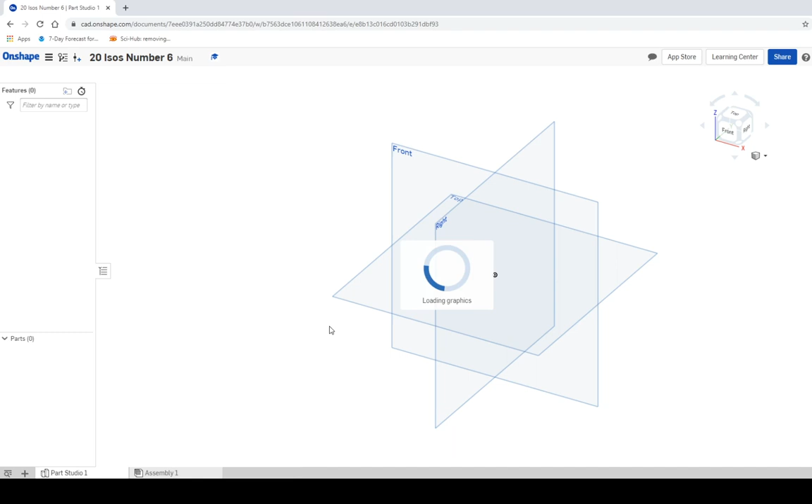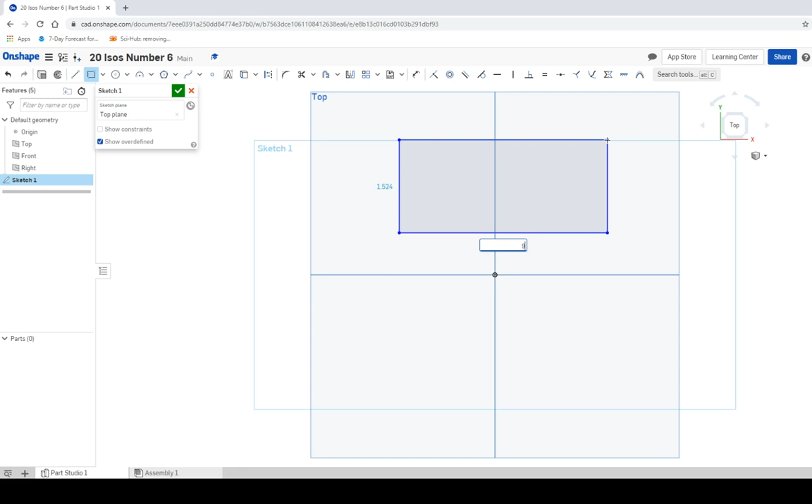And we're going to create our sketch from the top. So create a sketch, sketch from the top, make sure we get to our top view, and we're going to make a rectangle. Let's make it start anywhere that you want to—I usually don't like to start in the origin. Let's see, I think it said it was 9 wide and 5 tall, go click here, and then click the green checkbox. We'll have a box that looks about like this. Go click on this corner to get to the home view. Now let's see what we can do.

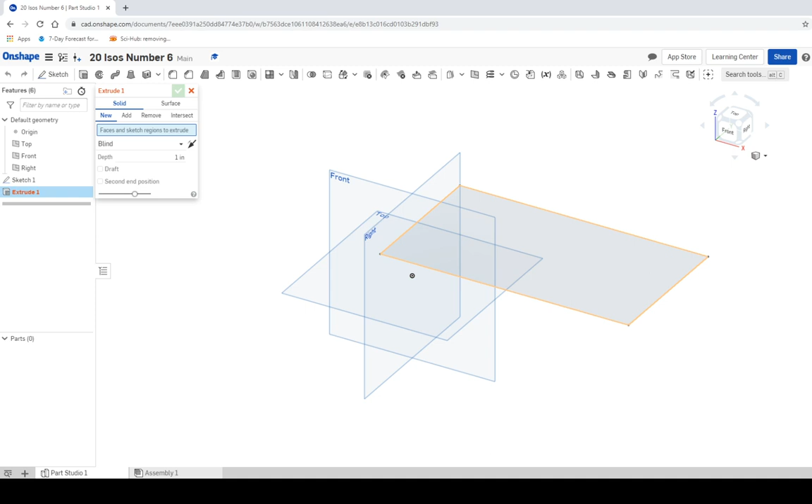I think it said, let's go back and reference—it was 5 high, so 1, 2, 3, 4, 5. Let's go back in here, and when we extrude, using the extrude button, we're going to click, and we're going to make it 5 inches high.

Okay, now to make the cuts, which cut do we want to make first? I think that we probably want to make the chamfer first, and then after we make the chamfer, we can make the cut go through. The reason I say that is if you make the cut first, the chamfer will only do one of the sides and you'll have to make 2 different chamfers. So I'm going to try to do the least amount of work possible—some people call me lazy, but I prefer to call it efficient. So we're going to just make the chamfer first, and then after we make the chamfer, we'll make the cut. If you do it the other way around, it's not that big of a deal, you'll be able to do it just fine.

Let's get an idea of how far we have to go here, see if we need to do a 2-directional or a 1-directional chamfer. Going down from the entire chamfer, don't forget you're going to have to move across this way. The whole thing is 5 units high, so we're going to have to make a direction of 5 units down, and if I count across, that's 1, 2, 3, 4, 5. So we can just do a 1-directional chamfer—it's 5 by 5, so it'll be even both ways.

So let's do that. I'm going to click the chamfer button, and I'm going to click on this side, and I'm going to change my distance to 5, and then I'm going to hit the check mark. And we'll have a nice little chamfer that goes all the way down.

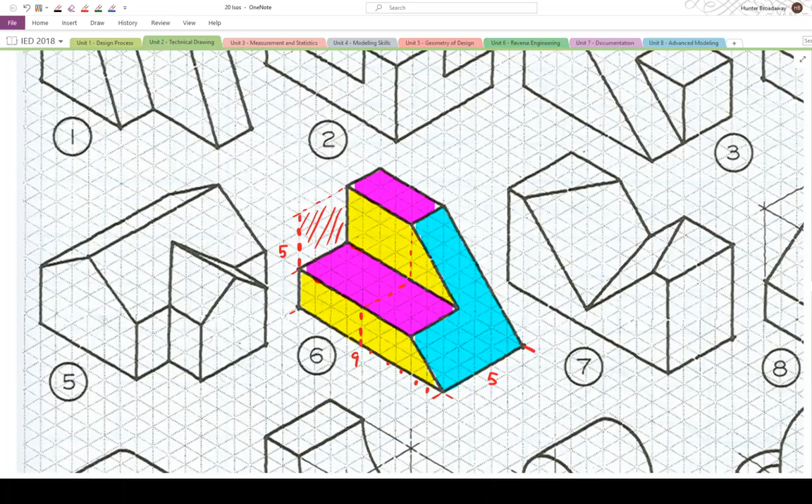So you have 2 options here, and in this case one of them is the right way and one of them is the wrong way. When we go back to OnShape, you could try to start creating your cut on this side, or you could start creating it on the flat side. You want to pick the flat side because you can get a rectangle and then you can cut out that way. If you try to make your sketch on the diagonal surface, when you make your cut, it's going to want to cut diagonally into the object. You don't want to do that.

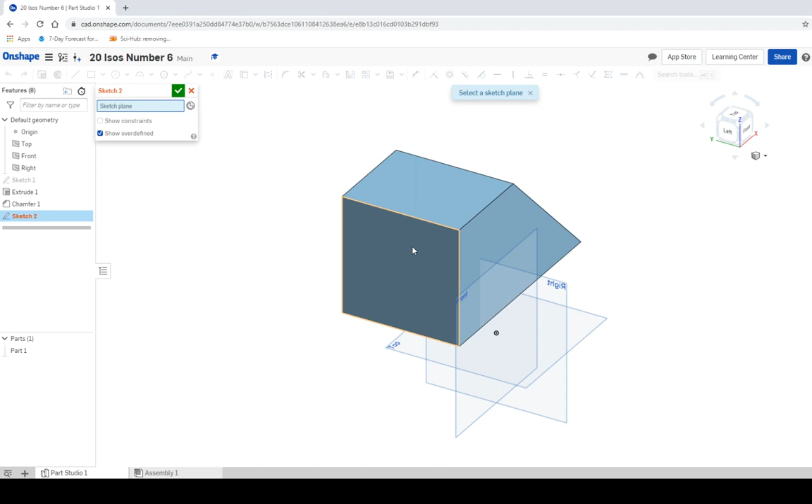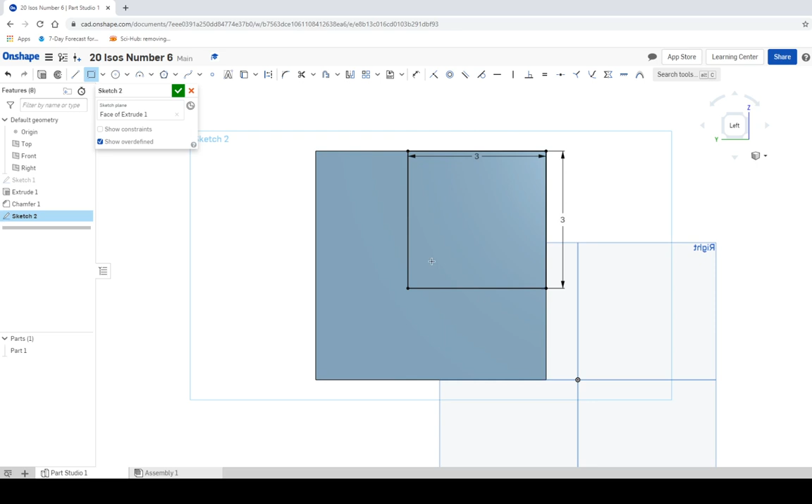So I'm going to create a sketch and I'm going to click on this flat side of the object. We're going to make a rectangle at the top corner. Click on the rectangle button and make sure that it matches up, it locks in place, and click. Make your rectangle wherever you want to, and then when you click, you can then put in the numbers. So I'm going to type in 3, enter, 3, enter, and that's going to give me my cut that I need to make. Green check mark.

Go back to some kind of isometric view, and we're going to extrude, but we don't want to push out, we want to cut in. So instead of selecting add, I'm going to select remove because we're going to be cutting. We could type in an actual distance if we wanted to, but since I'm just cutting out and I want that whole thing gone, I'm just going to take the arrow and drag it out all the way. And that's going to get rid of all of this section right here. Click the green check mark.

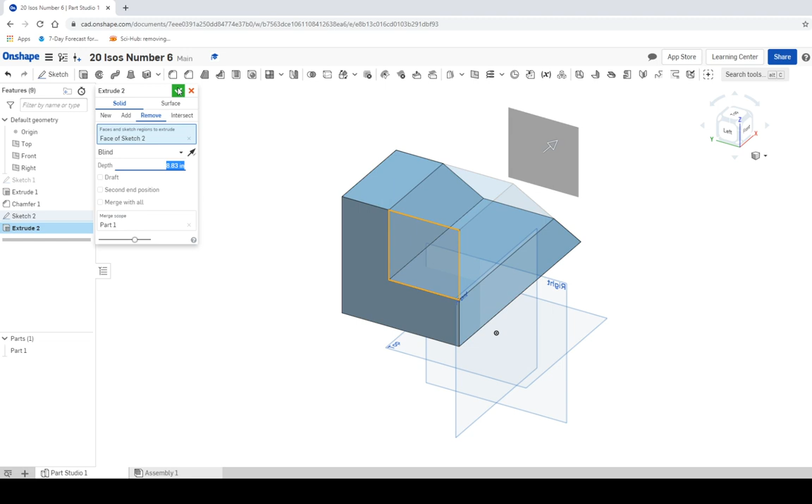And this one went kind of quick. So here you have it—this is 20 ISOs, number 6.